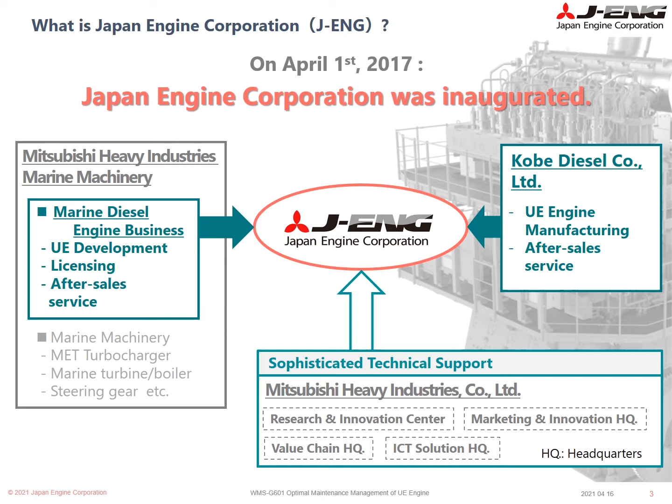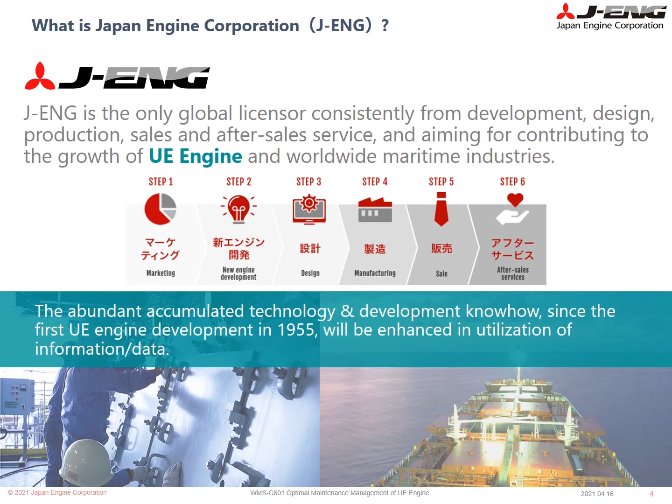Before we start, we would like to introduce Japan Engine Corporation, so-called J-ENG. In April 2017, Kobe Diesel and the Marine Engine Business Division of Mitsubishi Heavy Industries Marine Machinery were consolidated as Japan Engine Corporation. J-ENG is the only global licensor consistently involved from development, design, production, sales, and after-sales service, aiming to contribute to the growth of UE engine and worldwide maritime industries.

This slide shows the themes of our technical strategy, which we are actively engaged in researching and developing. Themes can be broadly divided into two categories: environmental friendliness and digitalization. In terms of environmental friendliness, the themes are further divided into four subcategories, such as reduction targets of NOx, SOx, GHG, and CO2. We are working on engine development and solution development while making various environmental technologies compatible.

In this seminar's topic, digitalization, we are implementing efforts to increase the added value for our customers by strengthening our existing services, by utilizing various digital technologies, and by providing support for using new environmentally friendly technologies.

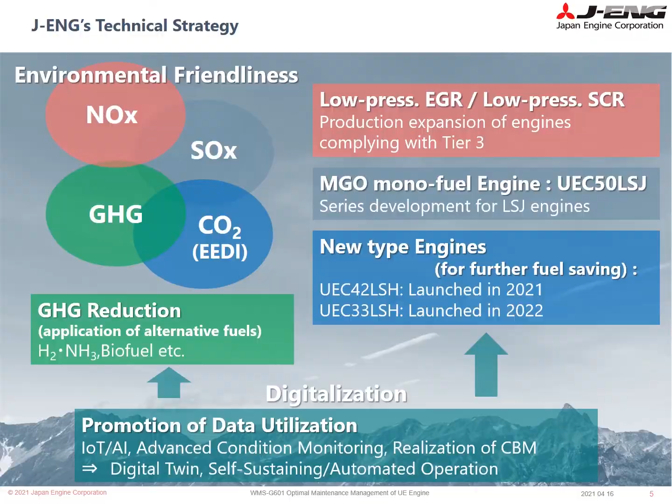First, we would like to talk about basic maintenance management. First of all, we would like to introduce our current after-sales service scheme. This slide shows the main service menu related to spare parts supply management.

On the left is a proposal for each-time purchasing of spare parts according to customers' inquiries or maintenance manuals. In the middle is a proposal for annual bulk purchasing, where we propose bulk purchasing of spares required for yearly maintenance. At the end is a menu where we propose spare parts required for docking of the ship.

We currently provide these menus for spare parts supply management. We are actively engaged in service activities according to the condition of the ships and for the convenience of our customers. In the next slide, we would like to introduce each menu a little more specifically.

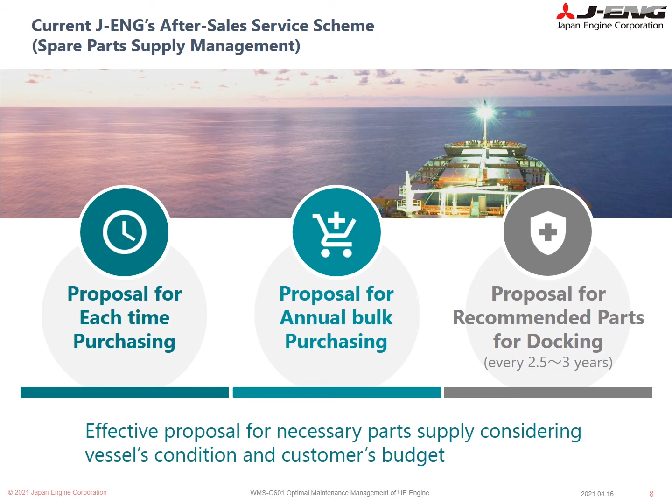The picture above shows the normal flow of after-sales service. The flow illustrates the transactions between shipping companies and J-ENG. Normally, the information of the ships is provided by the ship management companies. We arrange the requested spare parts and job scopes based on their information.

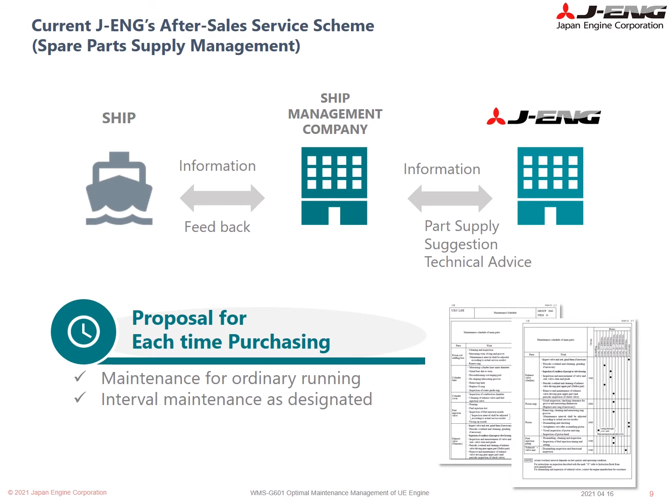Firstly, we will explain the proposal for each-time purchasing. Replenishment of consumable parts is the main part of spare parts management based on customer inquiries and maintenance for ordinary running. As a general spare parts purchase, we recommend maintenance based on time-based maintenance intervals as designated in our maintenance manual.

Next, we will explain the proposal for annual bulk purchasing. We propose the spare parts that will be necessary for the next year according to the age of the ships and the fleet management status of customers. As a feature, it is positioned as a service that reduces the cost and time burden on customers, and this menu can also support planning of customers' spare parts management.

Lastly, we will explain the proposal for recommended parts for docking. In this menu, we recommend necessary parts for docking work, considering the docking time and service status, in order to provide optimized docking maintenance work. This menu also has a feature to reduce cost and time burden. This is a service that provides total support for dock parts management and maintenance work planning.

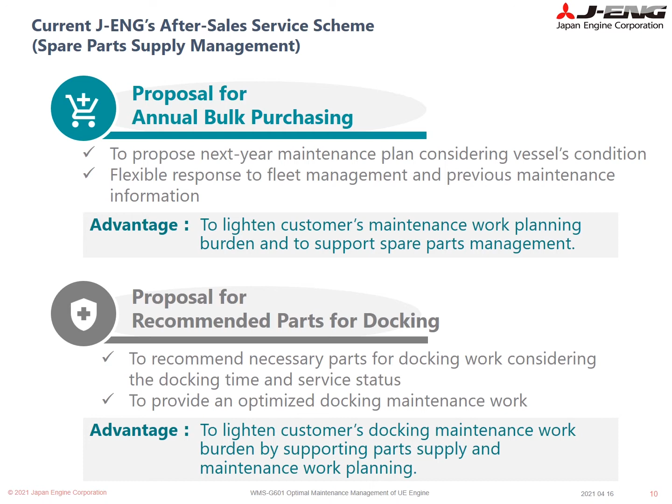Next, we would like to introduce the main service menus related to technical support. First is a menu to carry out on-site inspections and measurements of the main engine by dispatching engineers to vessels. The other is a menu to analyze the performance data of the ship, submit a diagnostic report, and give advice on performance improvement. All menus are provided by engine experts who can flexibly respond to the situation of the ship and customer inquiries.

In the next slide, we would like to introduce the contents of onboard services and performance evaluation. Here are examples of onboard service. We dispatch engineers to the ship to undertake engine inspection, measurement, and work supervising for vessels in service or docking. According to the inspection result, we can check the condition of parts of the main engine, judge the quality, and propose a maintenance plan. The photo on the left shows piston overhaul, and on the right shows main bearing overhaul. In these sort of opportunities, we also provide technical guidance to ship crews.

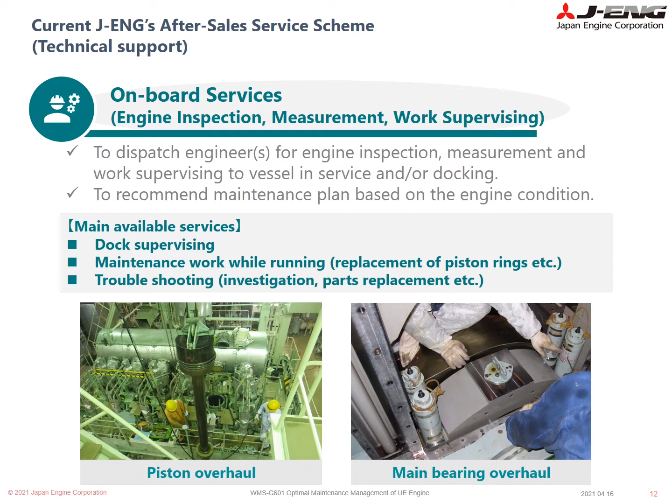Here are examples of the performance evaluation service. We provide an analysis report on engine performance data by analyzing engine operation data measured by the ship side during service. The data and reports are collected by email, and basically we advise appropriately on performance and conditions according to the customer's requests.

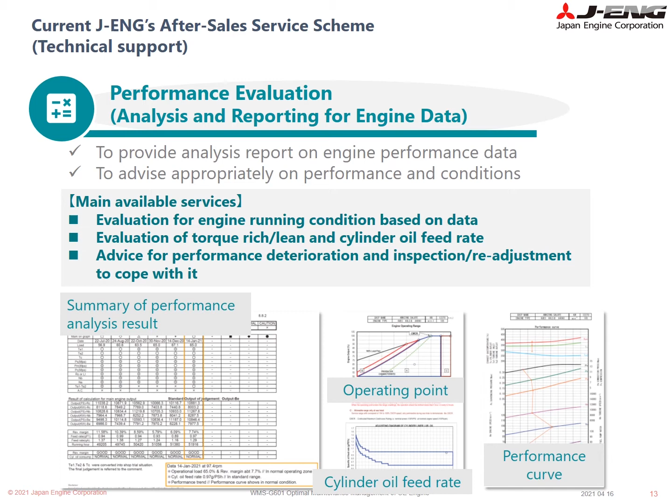Depending on the diagnosis result, we mainly provide proposals for performance recovery, and we advise to prevent troubles by providing technical support. In this scheme, our after-sales service provides support to our customers through 3 menus of spare parts management and 2 menus of technical support.

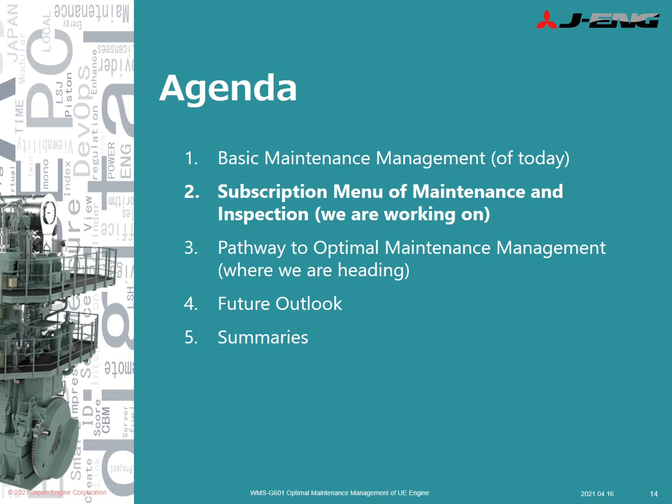Next, we will talk about subscription menu of maintenance and inspection. This is a flat rate service that packages onboard service and technical support. The package menu includes maintenance planning, onboard inspections, and performance evaluation. This service can seamlessly provide spare parts maintenance management and technical support. In this topic, we will give you an overview of this service and the effects we have experienced.

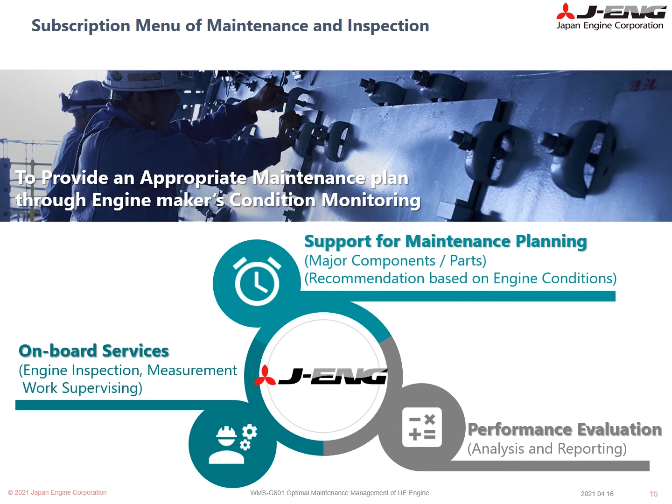Subscription menu of maintenance and inspection was born from customers' feedback. There were many requests, such as how to balance safe operation and proper maintenance, how to carry out planned maintenance with a limited budget, how to manage the shortage of ship crews, and how to manage technology transfer. We decided to propose this subscription menu for customers managing ships calling at Japan regularly.

After formulating and agreeing on a maintenance plan with the customer, we carry out parts management and technical support for the ships according to the maintenance plan. It is an effective menu to reduce the burden that customers cannot see and to eliminate anxiety.

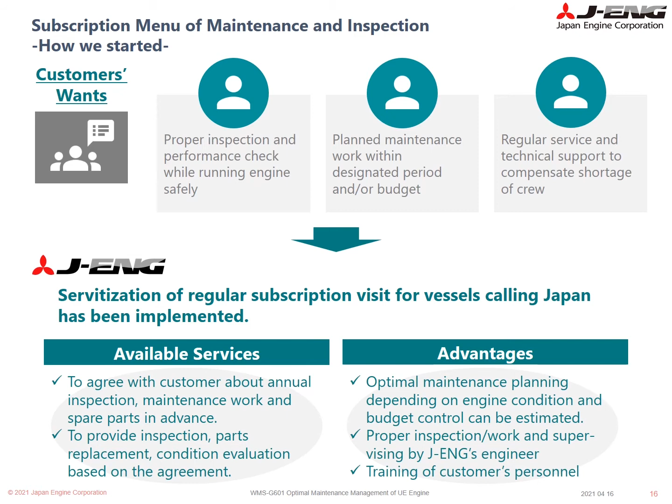As a result, we can provide support to the vessel more timely and accurately with less help from the vessel management company. In addition, by regularly sharing the information of the vessel condition with us, we are able to give more accurate proposals to the vessel management company, which led to an improvement in service quality. Furthermore, various information are always shared between the ship management company and J-ENG in order to respond smoothly.

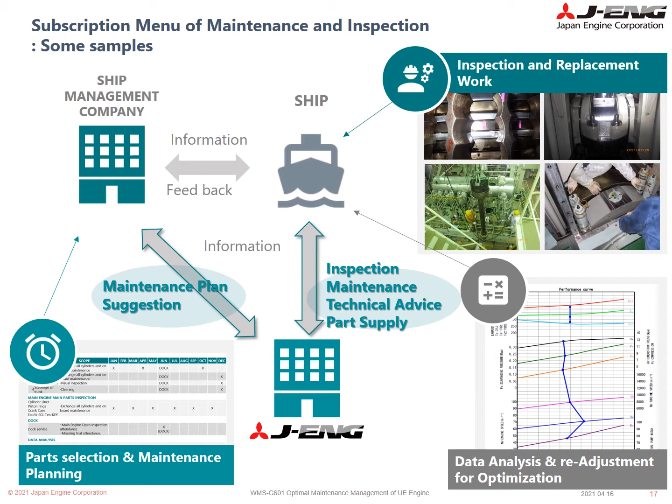This is a sample of yearly plan subscription menu of maintenance and inspection. In this case, we carry out maintenance on parts such as fuel valves, exhaust valves, cylinder liners, piston rings, and crankcase. And they are regularly inspected by our engineers.

In addition, if there is a docking, the inspection menu related to the docking job scope can be added in the maintenance plan. We share operation data and submit reports on a regular basis with performance analysis.

Through this service, we have experienced two things. One is that planned maintenance and proper maintenance are important factors for long-term use of engine parts. The other is that regular performance analysis is important for extending the usage time of engine parts.

When we actually carried out regular maintenance and continued to observe the condition of parts, in some cases, we found engine parts in good condition even after the usage time limit was exceeded.

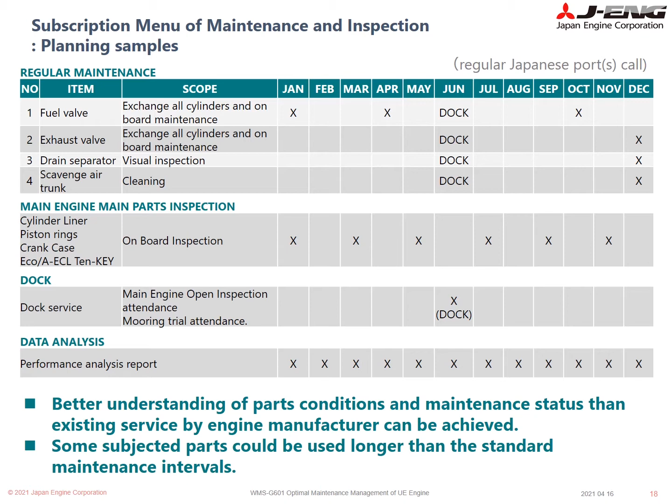Through these experiences, we believe that the subscription menu of maintenance and inspection has two good effects. First is the economic effect. By better understanding the condition of engine parts, it is possible to determine the appropriate replacement time of parts, and we can support the proper asset management and maintenance for our customers.

Second is the effect on improving service quality. By sharing operation data and maintenance information, we believe that by reducing unproductive work and noticing defects and improvements, we can contribute to the prevention of failures and retainment of performance.

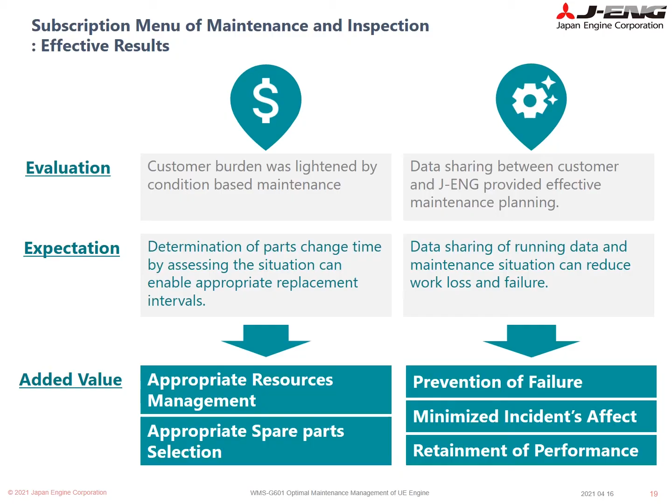In the next topic, we would like to show our pathway to optimal maintenance management. We are continuously making our efforts to deepen and create the value of our services in order to realize optimal after-sales service.

The existing after-sales service has been able to increase the value of the service through subscription menu of maintenance and inspection in response to our customers' feedback. As a next step, we are currently aiming for comprehensive services, and we believe that this can be achieved by sharing and utilizing data. In addition, we would like to increase the value of the services we provide to our customers by utilizing advanced support utilizing data AI.

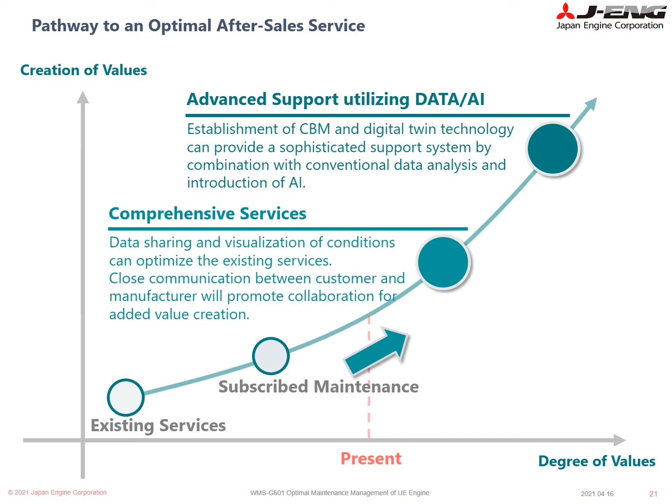In the next slide, we will introduce the status of efforts toward the realization of comprehensive services. In order to consider comprehensive service, we consider the issues which we found in the previous subscription menu of maintenance and inspection. We found two issues to challenge regarding economic benefits.

One is to deal with necessary parts selection without spot checking. The other is to deal with targeting irregularly scheduled cargo vessels.

Originally, the subscription menu of maintenance and inspection includes dispatching engineers regularly to the ship, which made it possible to grasp the status of conditions. Regular port calls to Japan with regular routes makes this service feasible. In order to apply this service to all vessels, we need to clear this issue.

There are two similar issues regarding the effects of improving service quality. One is sustainable data sharing, and the other is the establishment of parts conditions evaluation method instead of visual checks.

In many cases in the subscription menu of maintenance and inspection, we needed to make decisions by communicating information through people and checking the status of actual parts by visual checking. This issue needs to be clarified as well.

Based on these experiences, we focused on the value of data and decided to solve this problem by sharing and utilizing data. Specifically, we aim to visualize the operating status of the engine and the status of engine parts by sharing and utilizing data. We believe we can establish a method to analyze the status of the main engine.

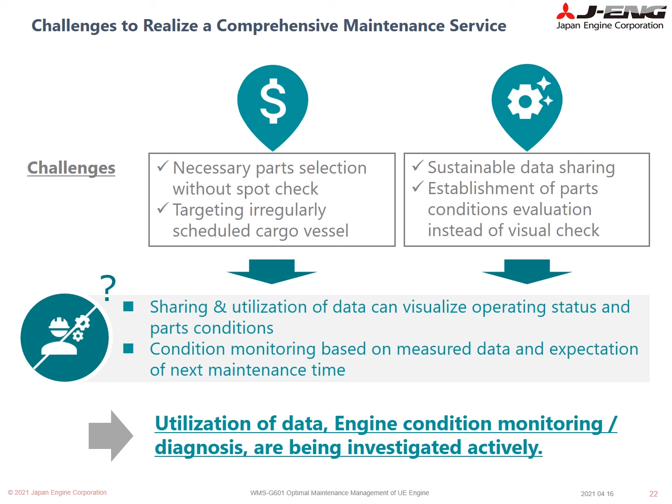This is a prototype of a comprehensive service architecture designed for data sharing and utilizing. In addition to the architecture of our ongoing subscription menu explained previously, data distribution is centered on the data sharing infrastructure. For example, IoS Open Platform of ShipDC is expected to form such a service infrastructure with fairness and safety. We believe our service menu can utilize this data sharing infrastructure to carry out performance diagnosis, maintenance planning, and to solve the mentioned issues.

We believe such a data sharing platform will be effectively utilized by all stakeholders, and shipping companies will be able to receive products and services not only from our company, but also from various companies. In order to realize this service architecture, we are promoting efforts to update our existing services by utilizing data.

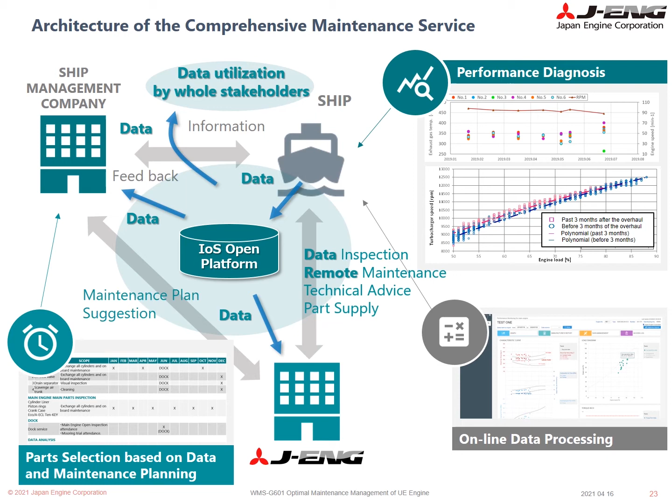In this slide, we would like to introduce the online tools for the performance diagnosis service. The ShipDC portal, which is an IoS-OP web service, is equipped with a function to visualize the performance of the main engine. By importing data into IoS-OP, parameters related to engine performance can be viewed as shown on this slide. Our performance diagnosis can also be collected by requesting through this portal.

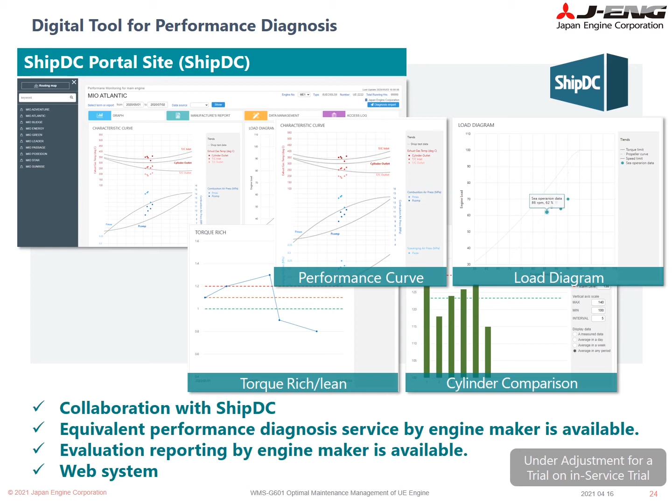This is a third-party online tool, which is tied up with the UE engine. Tekomar XPERT on the left is a web service similar to ShipDC's portal site. You can browse performance parameters by entering the data of engine operation. The feature of this product is that the performance diagnosis is automatically performed and the result can be obtained immediately.

On the right is the Lifecycle Administrator, which is an edge computing system with a diagnostic function installed on the ship. In addition to performance analysis, when troubleshooting, necessary manuals can be viewed in conjunction, and the condition monitoring function calculates the optimum fuel injection timing and lubrication rate.

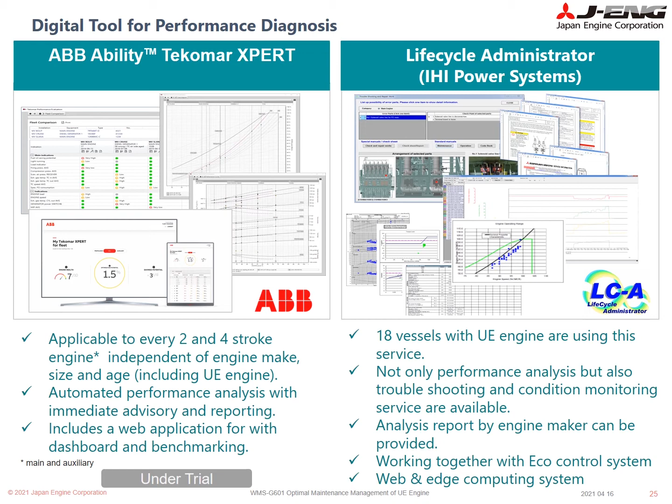Here are examples of a condition monitoring system which can be applied to UE engine. These are condition monitoring systems for bearings. There are three main sensors for engine bearings: temperature sensor for crosshead bearing, crank pin bearing, and main bearing. The bearing wear sensor on the right monitors the position of moving parts and shows how much wear is progressing due to the displacement of the position. It is also possible to install a moisture sensor for lubricating oil to detect bearing wear.

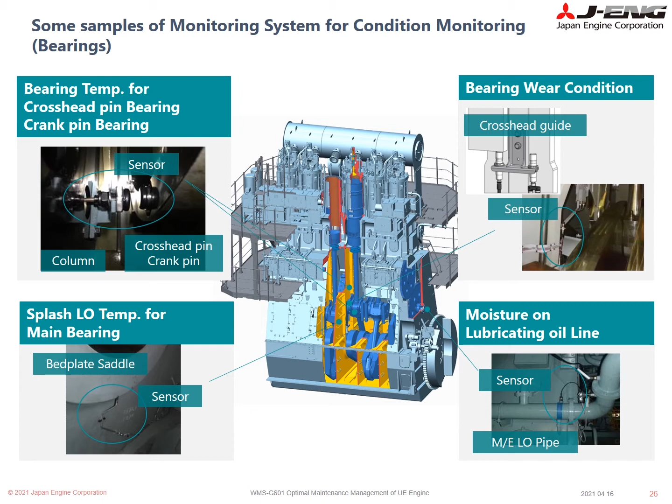Next is an example of a monitoring system around the combustion chamber. On the left side, you can see the cylinder pressure monitoring system that monitors the combustion pressure, and on the right side, you can see the temperature monitoring device of the cylinder liner. Both items are available for UE engines.

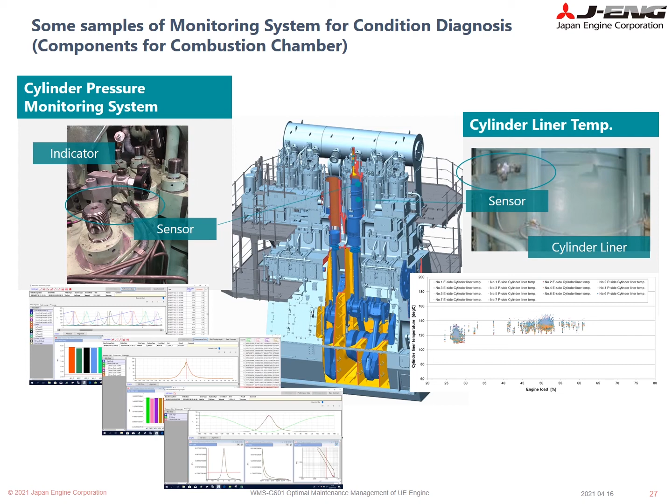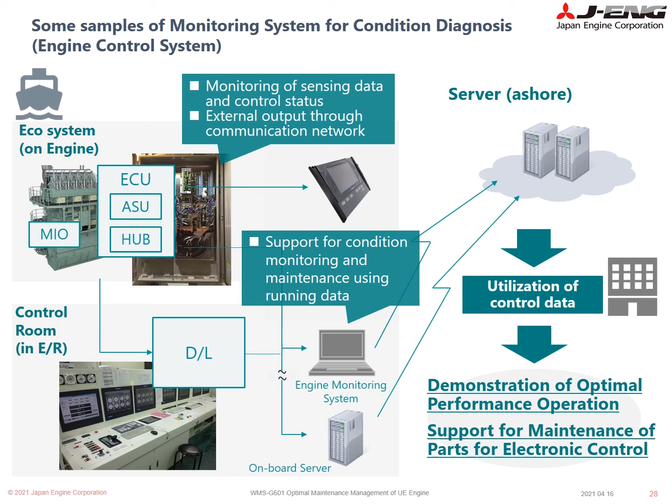Depending on how the data is utilized, we believe it will lead to proposals for reducing fuel consumption, optimal maintenance intervals, and early detection of failure.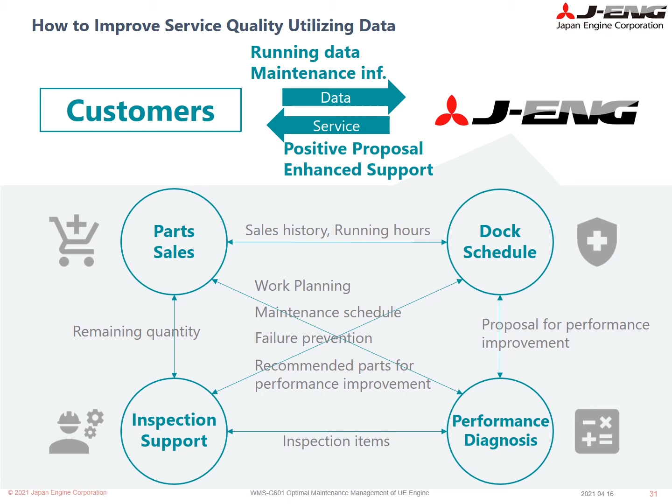Comprehensive maintenance service is a performance diagnosis and maintenance planning based on data. Furthermore, it is a service that can provide comprehensive added values to customers by improving service qualities due to the cross-functional effects of each service.

As you can see from the explanation so far, we can tell that sharing and utilizing of data is inevitable to realize the optimal maintenance. We also believe that shared data infrastructure can be also applicable to further advanced support solutions such as condition-based maintenance and digital twin.

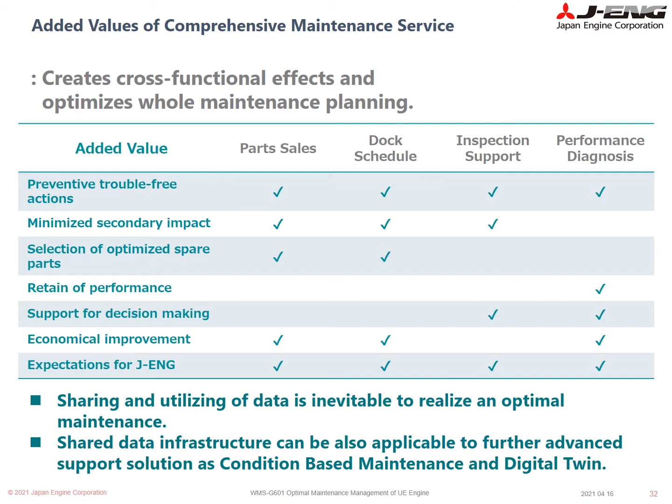Next topic is about future outlook regarding the optimal maintenance management. We are also engaged in research and development of advanced support technology in order to provide optimal after-sales service for our customers. Areas that we are particularly focusing on are condition-based maintenance and digital twin. In this part, we will briefly introduce each purpose and concept.

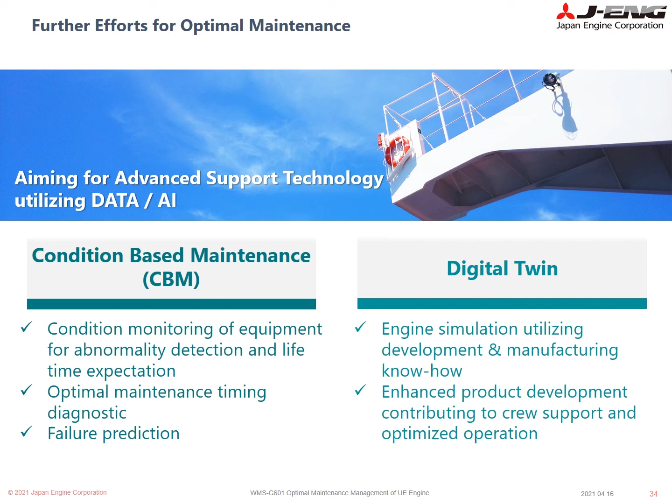In our CBM efforts, we use data to prevent such early failures. If the parts are still fully usable, we are aiming to establish methods which enable us to extend the maintenance period and reduce operating costs.

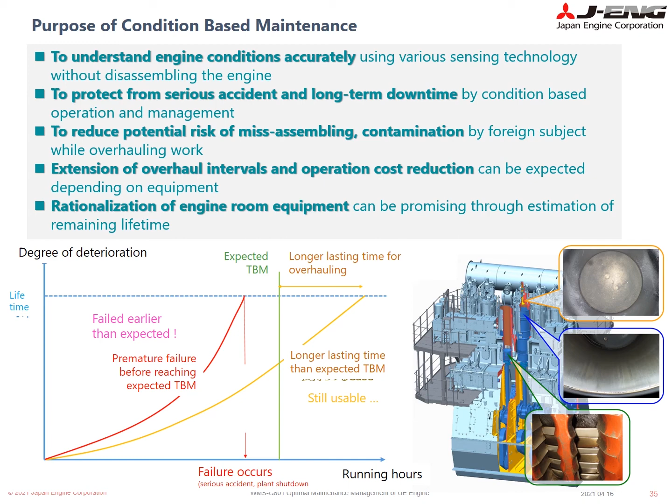CBM and equipment condition diagnosis methods are being actively challenged not only by our company but also by various shipping companies and marine manufacturers. For example, Class NK published the CBM guidelines in July 2019. We are also working on joint development of CBM with NYK, MTI, and Class NK. We will continuously carry out data analysis of engine condition and element tests using actual vessels to establish and maintain condition evaluation methods.

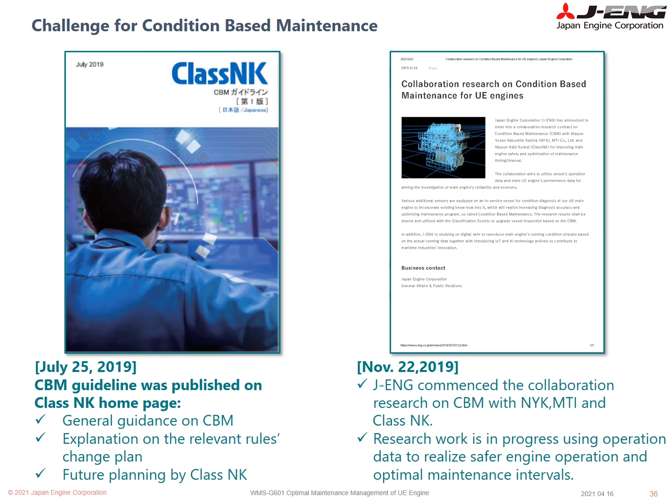And on land, we have another concept of microservices that enable customers and stakeholders to effectively utilize the data collected from the ship. In addition to providing services, we also would like to create values through various collaborations. With such an architecture, we would like to continuously increase the value of energy-saving operation, safe operation, and optimal maintenance planning.

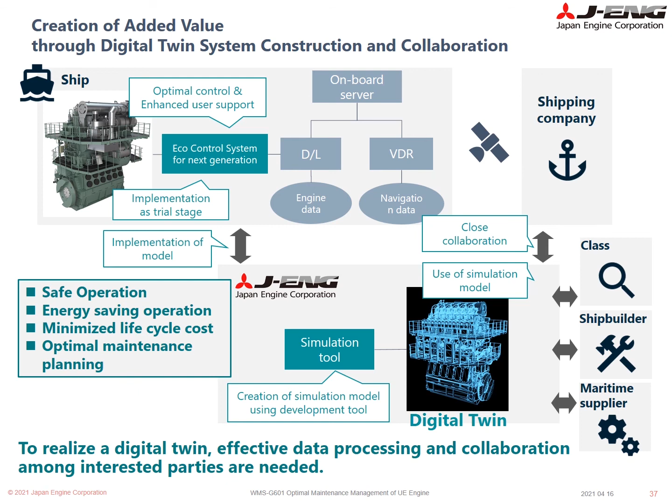Utilizing IoS Open Platform increases the added values, which leads to promoting the circulation of data utilization, which enhances the digital contents.

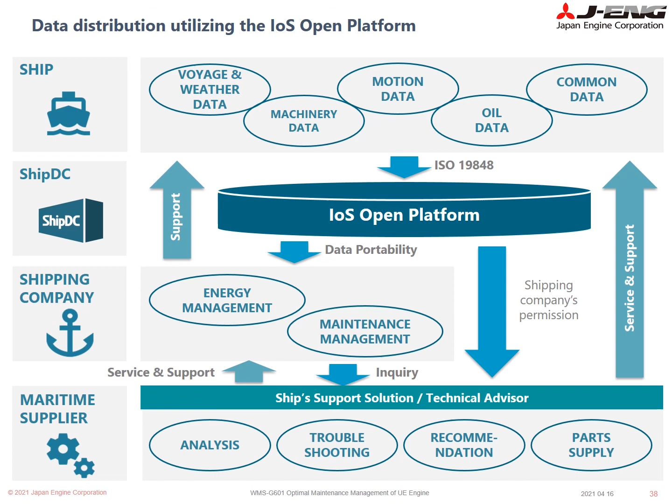At last, here are the summaries of our lecture for you to note. In this lecture, we introduced 4 parts of our efforts of optimal maintenance services based on our after-sales service experiences. We mainly explained that the utilization of data is effective for realizing better after-sales service. We also explained that data sharing and utilization services can be enhanced by advanced assistive technologies such as CBM and digital twin. And IoS-OP is an effective data sharing platform in such data sharing and utilization efforts.

In this way, digitalization efforts are becoming more active in the maritime industry as well. Japan Engine Corporation will continue to make various efforts to provide valuable products and services to customers by utilizing our development knowledge, which we have cultivated until today.